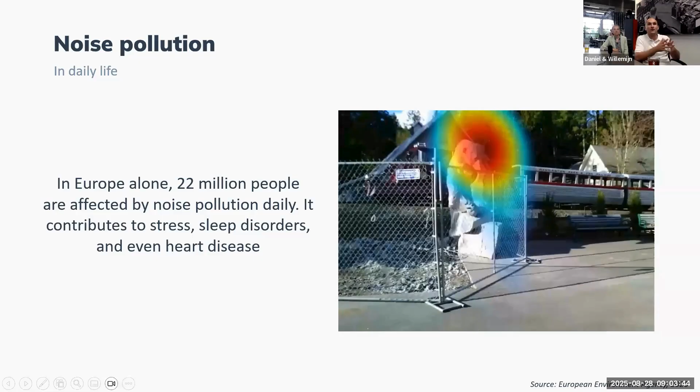Here's a video I took of a train while visiting the zoo, where I noticed how clearly the sound bounces off the concrete floor. And it made me think, in a city environment full of concrete buildings and floors, the sounds of cars, sirens, and jackhammers bounce back and forth. This constant reflection creates a soundscape where noise doesn't fade. This chronic exposure to noise, as already mentioned, impacts our health in many ways.

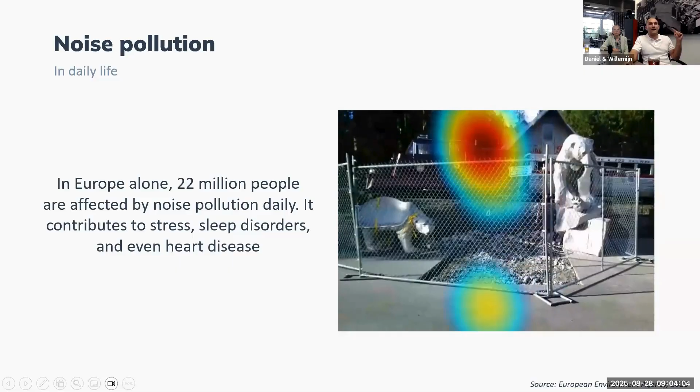And with all that in mind, you might be wondering, how loud is too loud? According to the World Health Organization, the threshold is about 70 decibels. As a reference, inside an airplane is about 80 decibels, which is already harmful for you if you're exposed to this level for a long period of time. It's also safe to say that sounds above 120 decibels close to your ears will cause permanent hearing damage.

We often mention noise, and I just want to take a moment to explain what separates any sound from noise. We define noise as sounds out of place, an unwanted sound. Many of us assume noise is just any loud sound, but that's not always true. A waterfall, for example, can be very loud, yet it's not considered noise because it belongs in its environment.

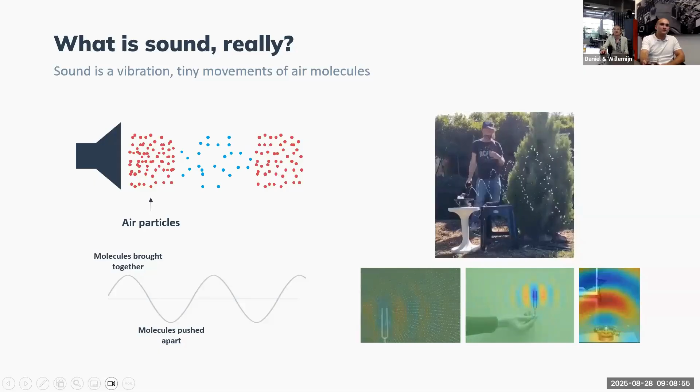Anyhow, jokes aside, sound works when a vibrating object creates waves in a surrounding medium, such as air or water. These waves consist of compressions, where particles are close together, and rarefactions, where they spread out. They travel outwards from the source, and when they reach your ear, they cause your eardrum to vibrate. And this is actually what your brain interprets as sound.

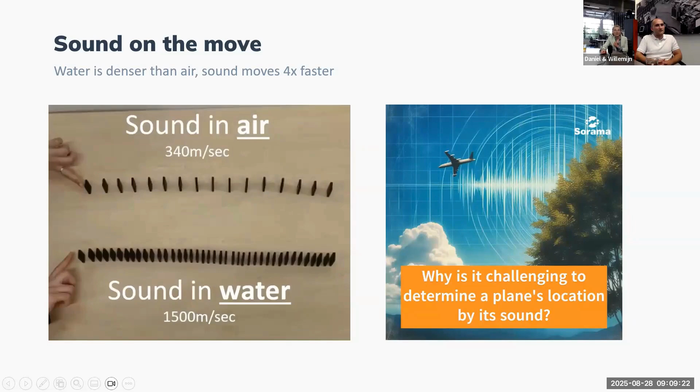A question to think about while looking at this video: why do you think it's hard to localize an airplane based on its sound? It's actually because of the travel time of sound. By the time the waves reach your ears, the plane has actually already moved on.

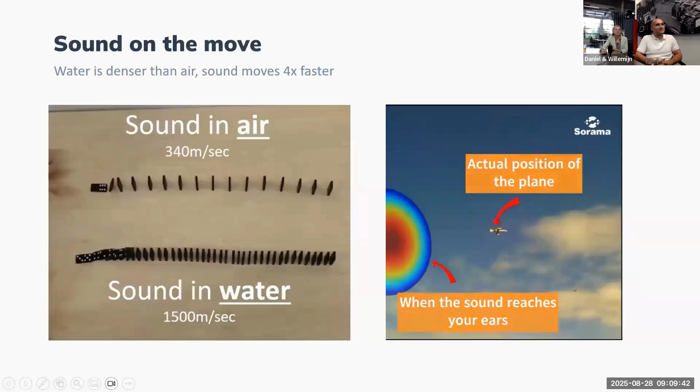So we don't just hear one sound wave, but we hear many of them at the same time. Different vibrations have different wavelengths, and these wavelengths determine the tone of the sound. High-pitched notes have shorter wavelengths, and lower notes, such as humming, have longer wavelengths. And these also tend to travel further.

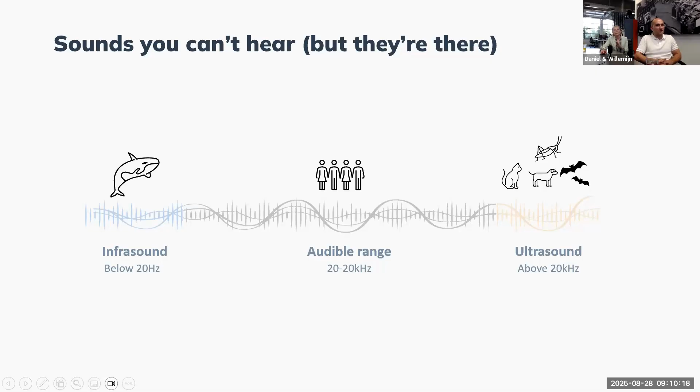On top of that, we also don't hear all of the sound waves around us, as humans have an average hearing range of 20 to 20,000 hertz. Below that range is what we call infrasound, and above that is what we call ultrasound. We can't hear it, but there's actually quite a lot of communication going on from animals in those frequencies.

An acoustic camera is used to locate and characterize sound sources. It works by using beamforming to process signals from multiple microphones and determine the location and direction of a sound source. By doing so, you can see where the noise is coming from, and this is actually quite similar to how our own ears localize sound.

Sound travels via sound waves to your ears, and when it first arrives at your right ear and later at your left ear, you can localize where the sound is coming from. In our case, we need at least 2 ears to localize sound.

An acoustic camera is even more precise because it has 64 and sometimes even up to 1,024 microphones. One microphone picks up the sound wave earlier than the others, and with a technique called beamforming, the location of the source is triangulated. The device then creates a colorful acoustic image over a camera stream as a visual aid, similar to how thermal cameras visualize heat. An acoustic camera literally lets you see sound.

Yes, thank you, Willemijn. To add to what you just said, I think the challenge with sound is that we hear it, but we don't always know where it's coming from. For example, recently I was walking in the forest and I heard a bird sing, but when I started looking for it, it was actually quite difficult to spot where the bird exactly was based on its sound.

When we visualize it, on one hand, we add another sense to the mix because now you can see it, and we can also learn how it interacts with the space around us. By visualizing where reflections are and how intense they are, it turns sound into something we can understand and act on, especially in complex environments.

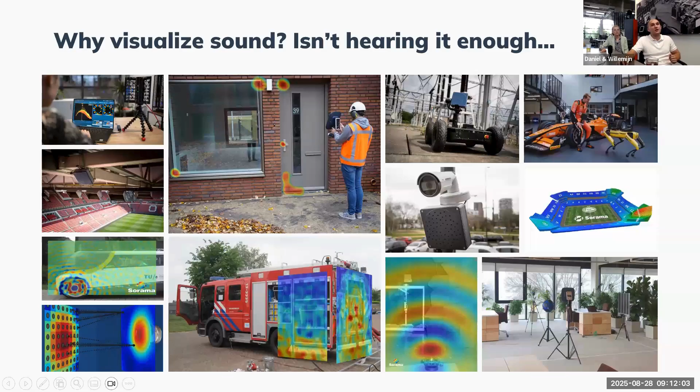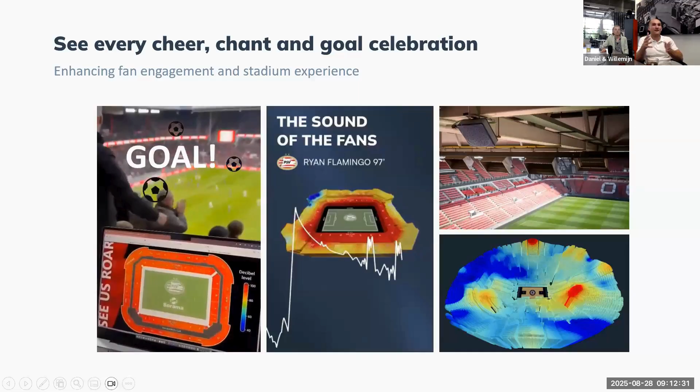Talking about visualizing sound, now imagine a stadium full of fans. Visualizing the sound during a game is used to engage fans by showing which sections are the loudest. It can be used for games like section battles or identifying the loudest fan. In fact, one of our US partners is already doing this. They track fan noise and link it to an app where fans can earn points that can be exchanged for tickets, drinks, or even free cheeseburgers. It turns fan sound into a reward system.

Moving from stadiums to city streets, these technologies can be used to detect loud vehicles like motorcycles or cars with modified exhausts to enforce noise regulations.

Visualizing sound is also changing how we study nature. Many animals use sounds we cannot hear to communicate, like bats using echolocation to navigate, or mice using ultrasound to communicate. We've worked on bioacoustics projects with mice, pigs, birds, bats, bees, crickets, each with their own unique sounds.

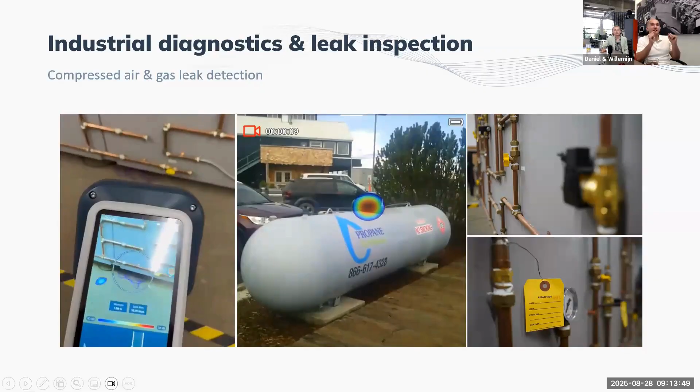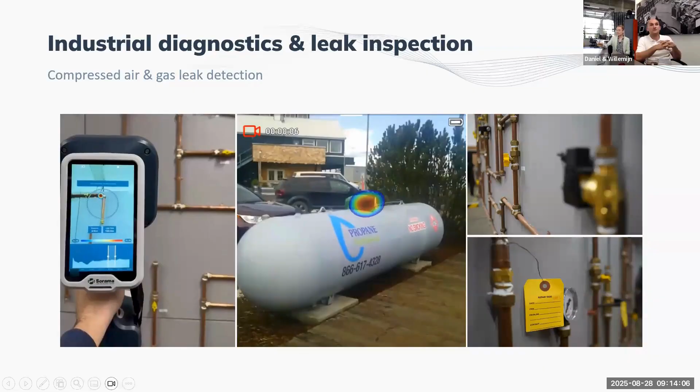We just saw a few creative applications of sound visualization, but its most widespread application is leak detection. In industry, acoustic cameras are widely used to find compressed air and gas leaks. How it works: imagine a tiny crack in a pressurized pipe that creates high-frequency sounds we can't hear, but acoustic cameras can pick up. This isn't only useful, it's essential, because up to 1/3 of compressed air in factories can be lost through leaks, costing tens or even hundreds of thousands in wasted energy.

Another key application is detecting partial discharge in electrical systems. These discharges produce unique acoustic signatures that show insulation issues in high voltage equipment. Visualizing these sounds helps to prevent equipment failure and improves safety.

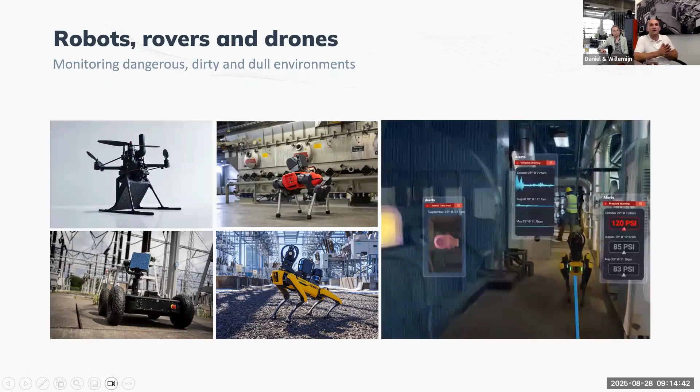Talking about safety, in environments that are dangerous for people, acoustic sensors can be mounted on robotic dogs, rovers, and drones. They can autonomously navigate industrial sites, tunnels, or remote areas to detect issues without putting humans at risk.

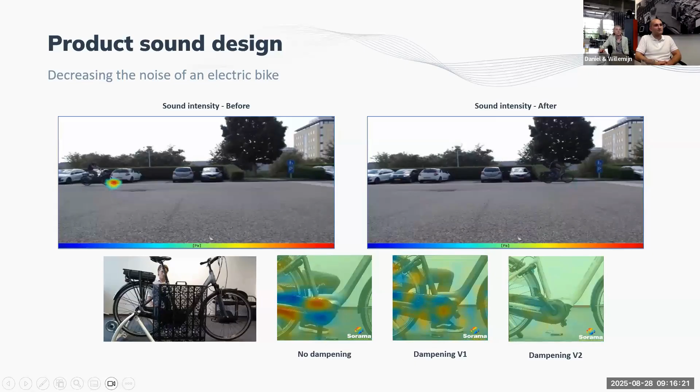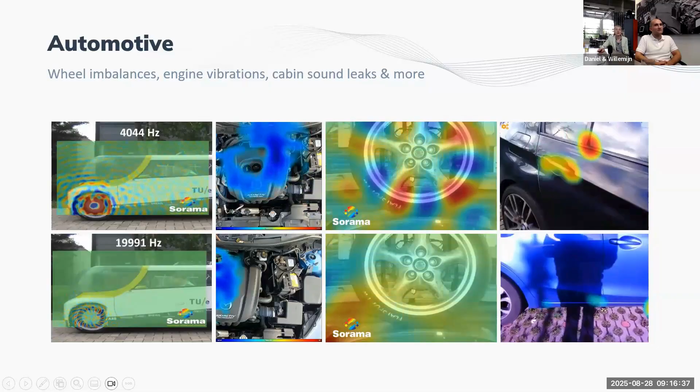Luckily, sometimes we also get to have a bit of fun with our technology. For example, during the Glow Festival here in Eindhoven, where every year designers and engineers create interactive light art installations, a couple of years ago we participated by creating an experience that would create visuals underneath you when you make noise. And that is definitely something that you don't have to tell kids twice—we've experienced that firsthand.

Lastly, there's also citizen science projects that allow us to gain insight into the soundscape of a bigger region. Each year we organize the Noise Awareness Day, where we ask the public to make sound measurements with their phone in order to create awareness on noise pollution.

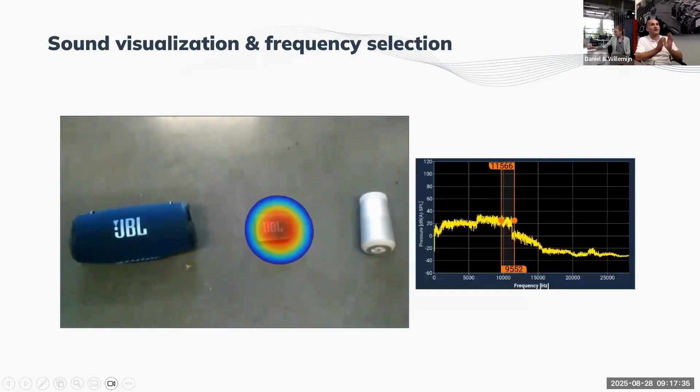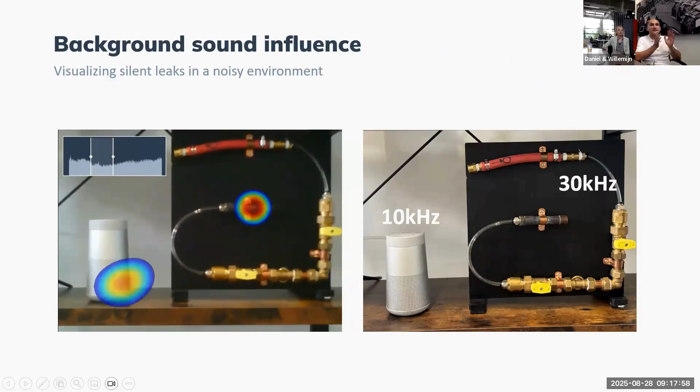People often ask us if acoustic cameras can focus on certain sounds and ignore background noise. Actually, that's one of the key things they're designed to do. The three speakers you see in the video play at the same time at a different frequency, but we can choose which one to see. That's because the camera doesn't show all the noise around you—it shows the frequencies you choose as a user. That makes it possible to spot a quiet leak next to a loud machine. It can see the leak's frequency and ignore everything else.

Okay, now let's take a short breather and summarize what we covered so far. We explored how sound visualization can be useful in nature, cities, stadiums, industry, and for inspections through robotic platforms, as well as product development. Now let's look at how this technology applies to the built environment.

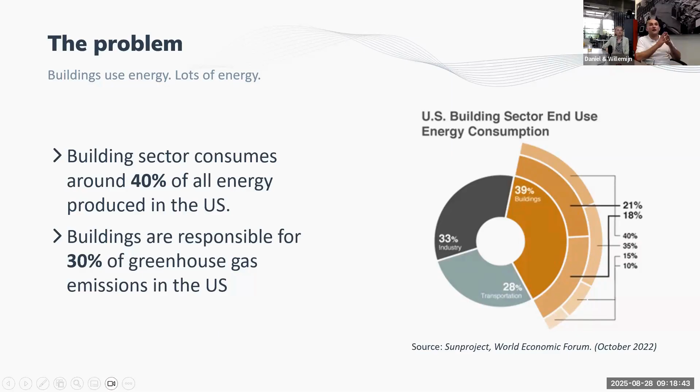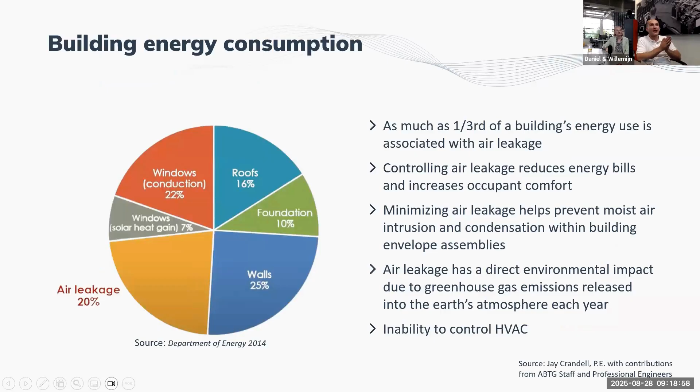Buildings play a huge role in energy use and emissions. As you know, in the US, the building sector consumes nearly 40% of all energy produced and contributes 30% of greenhouse gas emissions—that's more than any other sector. A major step toward reducing environmental impact is improving how buildings are built and maintained. Improving the performance of a building starts with controlling air leakage. When it's not managed properly, it affects everything from comfort and moisture control to HVAC efficiency and emissions.

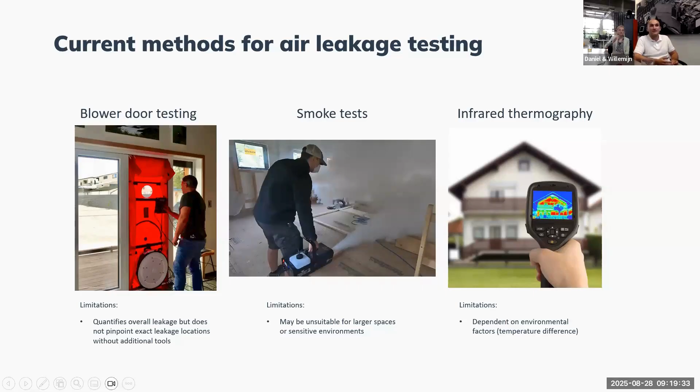As many of you know, the blower door test is currently the go-to method of testing how airtight a building is. It's great for meeting energy standards, comparing buildings, or seeing if renovations made a difference. But the catch is it only gives a general idea of how much air is leaking, not where the leaks are. Finding specific leaks can be slow and tricky. There are tools like smoke sticks, infrared cameras, and tracer gases that can help, but they all have limits, like needing certain temperature or pressure conditions to work well.

Today, we'd like to show you how sound visualization can be a useful method. We use it to spot leaks and gaps in buildings quickly and clearly.

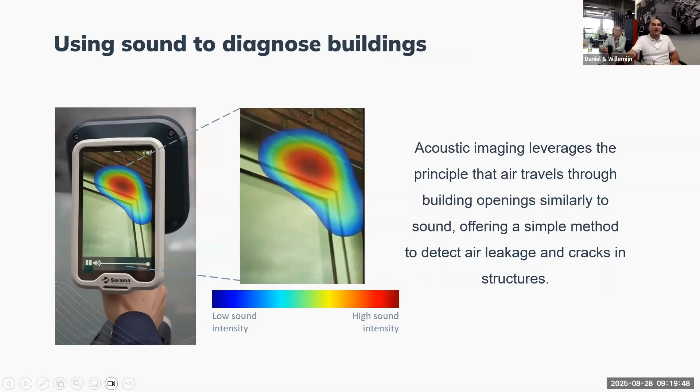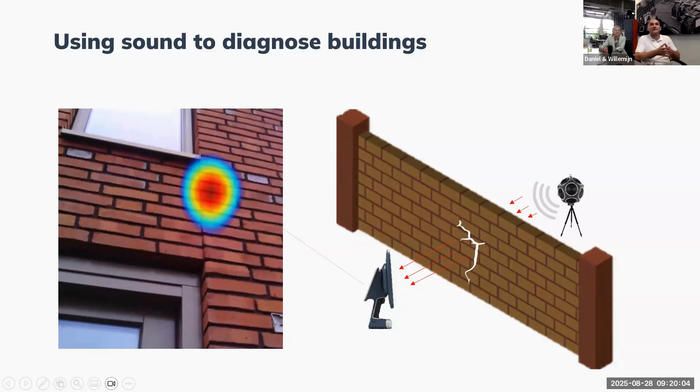The idea is simple: to find leaks, we need to make noise on purpose. We play speakers to generate sound, which finds its way out through any fractures and cracks, same as how the air would escape. Then the acoustic camera registers these leakages and pinpoints the location.

Here I have a short video to give you an impression of how a practical test looks like. On the opposite side of the door, we have the speaker generating sound. The sound waves penetrate through any openings, and we are able to visualize it with an acoustic camera.

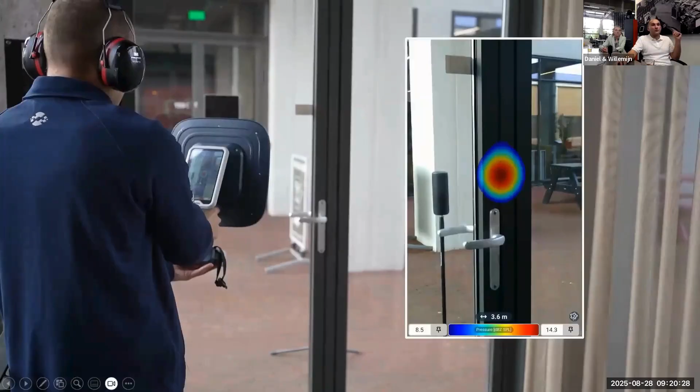Probably you're wondering, how does acoustic imaging compare to thermal imaging? Here I have a side-by-side comparison. This is a newly built passive house undergoing the blower door test. On the left side, you can see how a thermal camera registers the air leak, and on the right side, how an acoustic camera registers the air leak.

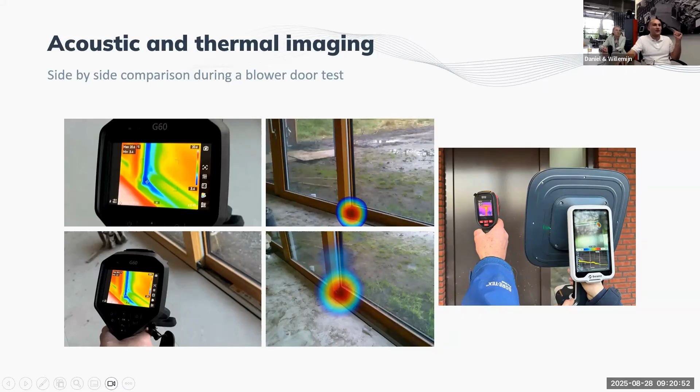In some situations, acoustic imaging can be a bit more sensitive. For example, here the thermal camera registers the leak mainly on the bottom right corner of the window frame, whereas the acoustic imaging reveals the whole bottom slit leaking. So a combination of both tools will give you the best results.

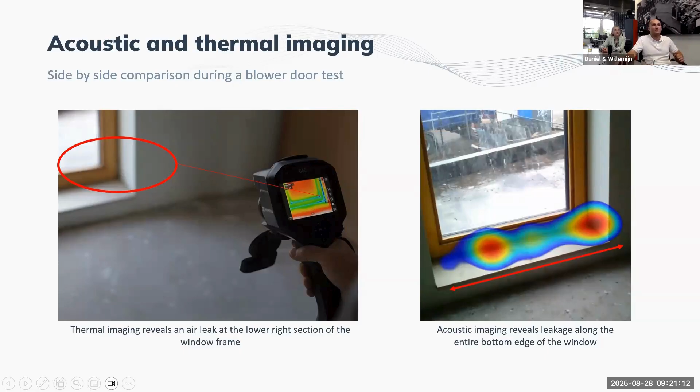To summarize how acoustic imaging compares to thermal imaging: on one hand, you are not dependent on going through the hassle of installing blower door equipment. The buildings can be tested throughout the whole construction process because you're not working with closed volumes.

Right now, it's quite warm in the Netherlands, so a thermal camera will not work effectively, and acoustic imaging can be an option. You can verify acoustically whether the thermal camera leaks you're registering are not reflections, thermal bridges, or false positives, and you don't need advanced training to use this technology.

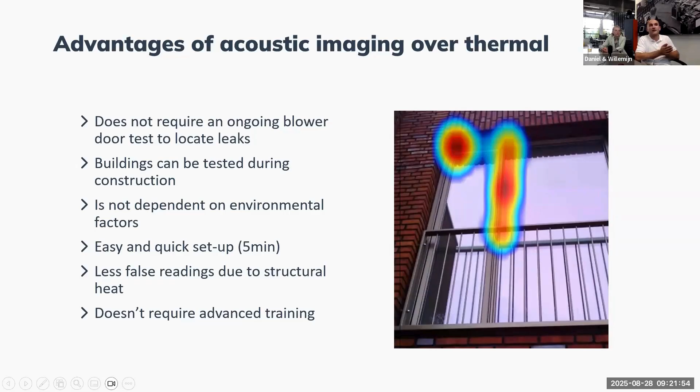To test buildings with sound, you can use anything from a simple handheld Bluetooth speaker to a professional omnidirectional one. The goal is to make sure sound reaches all parts of the area you're testing. If you're using a less powerful speaker, it's important to move it around the frame to ensure full coverage.

It's usually best to place the speaker inside the building because hard surfaces help reflect the sound outwards, which makes the test more effective. Depending on the situation, you can use sounds that people can or cannot hear, especially useful when testing in occupied buildings.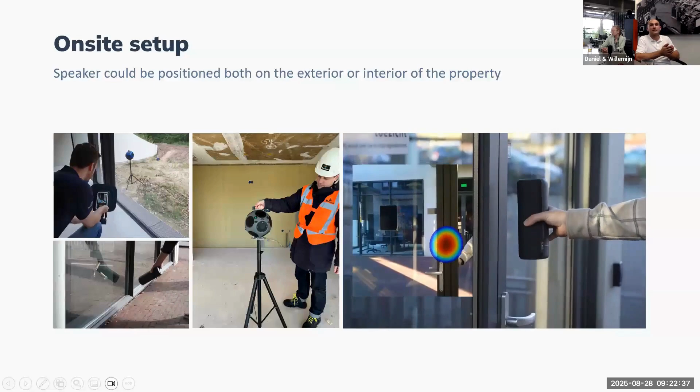Now let's explore some of the practical applications of this technology. In the next few slides, I will show you many different use cases on different types of buildings that I have personally measured. Let's start with the first one.

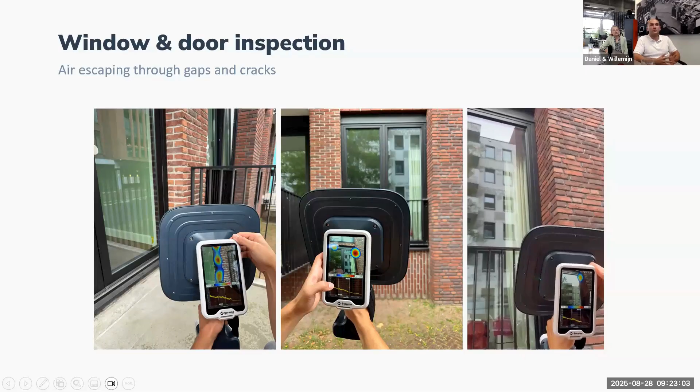As you know, windows and doors are usually the weakest points in the building envelope and contribute most to air leaks. Proper installation and quality control is crucial because even the most energy efficient windows won't perform if installed poorly. It defeats the whole purpose of investing in high performance windows. Without proper sealing around the frame, for example, air and moisture can easily sneak in and reduce the lifespan of your products.

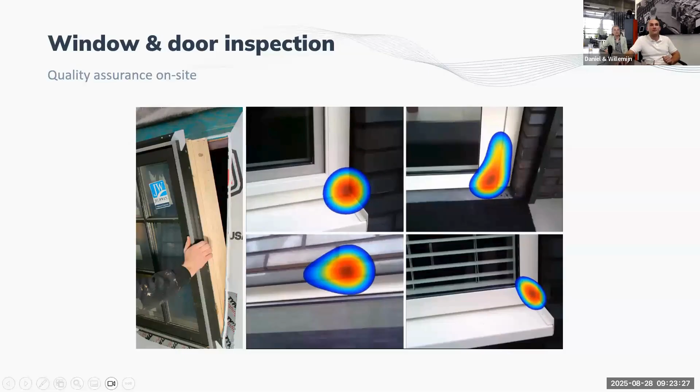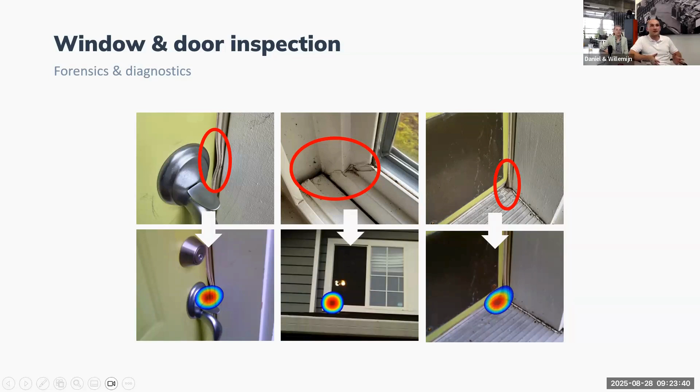In addition to testing the installation on site, window and door manufacturers can benefit from the technology to make their products better. It can be used to test different sealants, insulation materials, glass thickness, and make very quick product iterations.

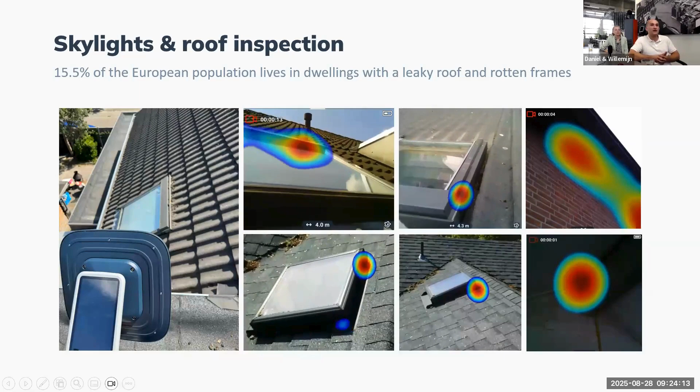Leaky skylights and roofs are a growing issue across Europe, affecting over 15% of the population. And when it comes to leaks, time matters. If ignored, even small air and water leaks can lead to serious damage. Older skylights often leak because of damaged seals. It's a useful application not just for installing new skylights correctly, but also for quickly diagnosing problems in existing ones before they get worse.

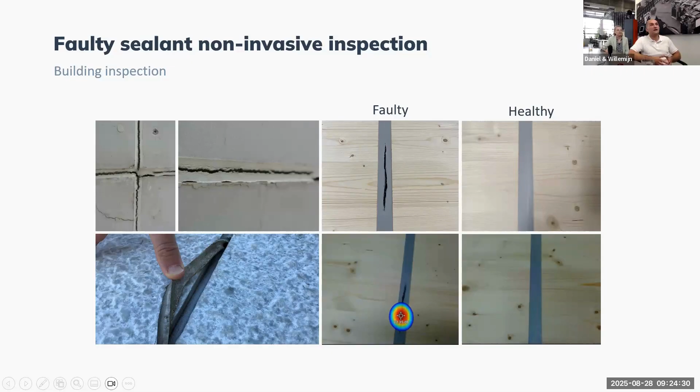Sound visualization can be a surprisingly powerful method for inspecting worn-out sealants, as there are currently no non-invasive methods available for testing sealants apart from a visual check, which is very subjective. This method is more factual and objective.

Leaks in facade joints and corners are common issues in buildings, often stemming from material deterioration, improper installation, or design flaws. The first step of addressing the problem is identifying it. This is where technology can be useful. If a facade is not leak-free, apart from the energy efficiency losses, it might result in moisture issues, which is very expensive to fix down the line.

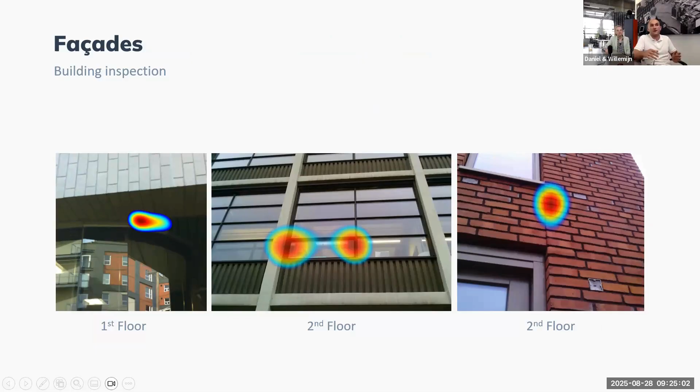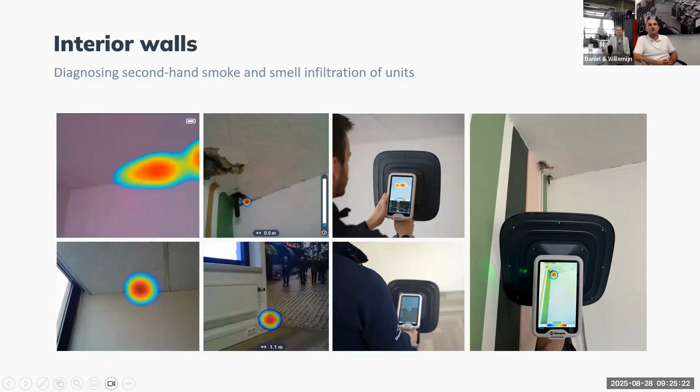In multi-unit buildings, smoke or cooking smells from one apartment can transfer into another through shared walls or ceilings, especially due to poor connections between the ceiling and the interior walls. If you're trying to diagnose the root cause of mystery smells in your buildings, acoustic camera technology might come in handy.

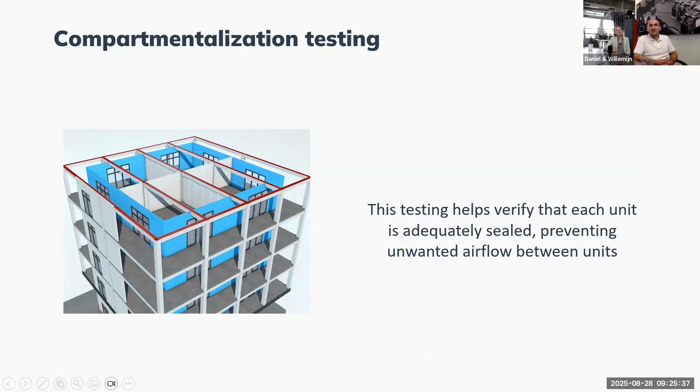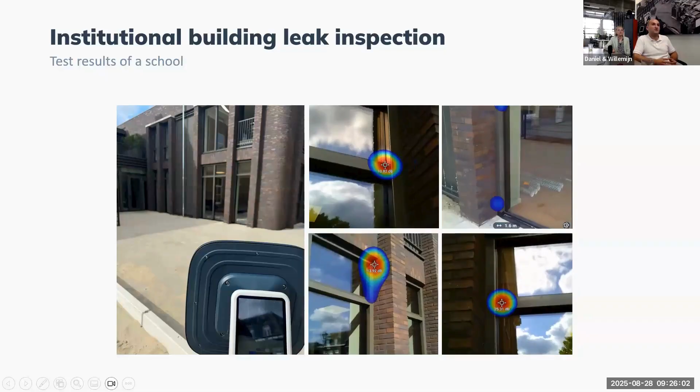Institutional buildings like healthcare facilities, educational institutions, or libraries and museums in Europe often face stricter air tightness requirements, especially when they are part of energy performance regulations or high-performance building programs. On this slide, you can see the results of a school building test in the Netherlands and the leakages we were able to find. In historic buildings, especially protected ones, traditional air leakage testing can be risky.

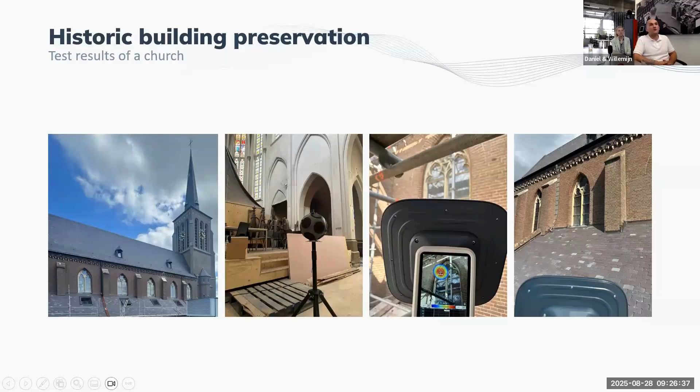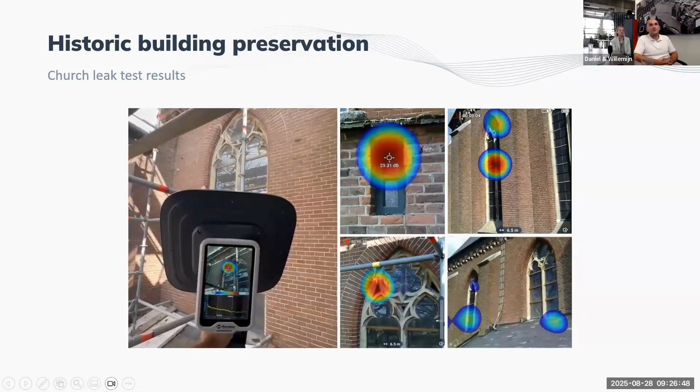Pressurizing the building with a blower door may disturb fragile materials, release dust from within the structure, or damage valuable furnishings. That's why acoustic testing can be a valuable alternative. It's completely non-invasive and works under natural, low or no flow conditions without needing to force air through the building envelope. This slide shows a test we conducted in a church where we were able to identify leakage paths without disturbing the structure or its contents.

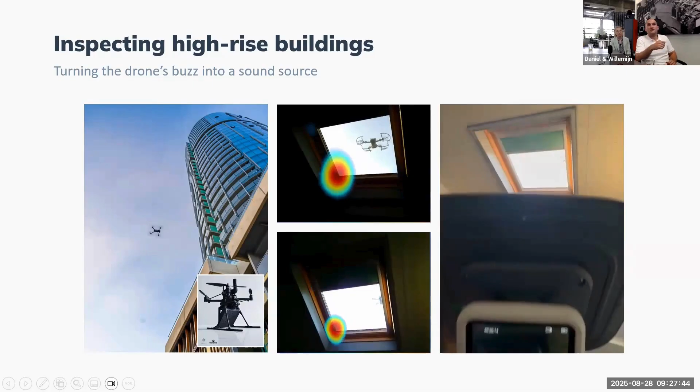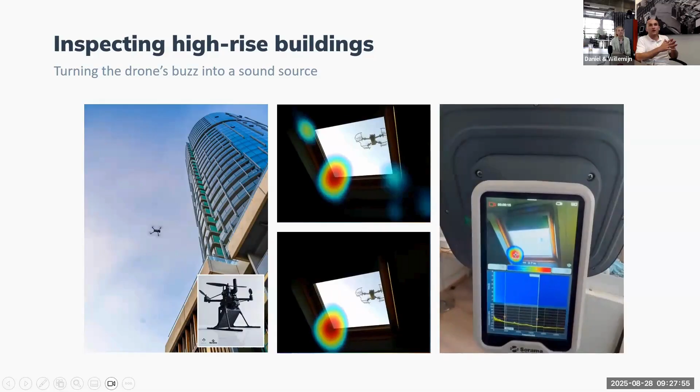So how can you inspect high-rise buildings? It's a question we often hear. A creative and practical solution is to use a drone. We can use its buzzing sound as a sound source. The drone's propellers naturally generate high-frequency noise, which acoustic cameras can pick up and visualize. This allows us to detect leaks around windows, facades, and joints in high-rise buildings.

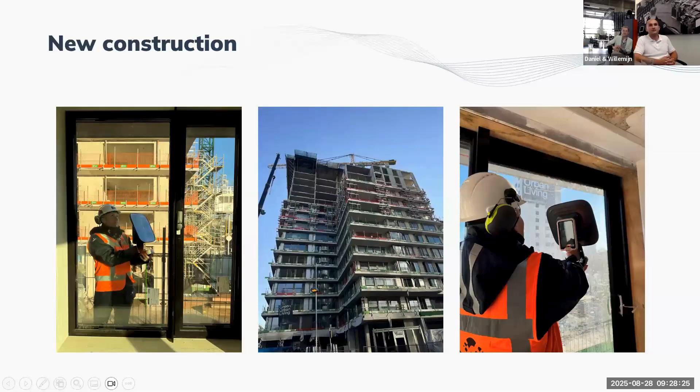Unlike traditional methods that need sealed rooms and finished spaces, with acoustic camera technology, you don't have to wait for the paint to dry, so to say. It can be used throughout the entire building process, from early construction to final renovations, since they don't rely on closed volumes. They're perfect for spotting leaks and flaws before walls are sealed or systems are locked in. The technology can help detect leaks very early during the manufacturing of prefab facade systems, wall panels, and modular units to make sure everything is sealed properly from the beginning.

However, they're usually tested when everything is clean, controlled, and precise. That's when airtightness looks great. But once these systems are installed on site, things change. Assembly in the field almost always leads to more air leakage. Sound can be useful during production to catch issues early, and later during installation to make sure quality holds up in the real world.

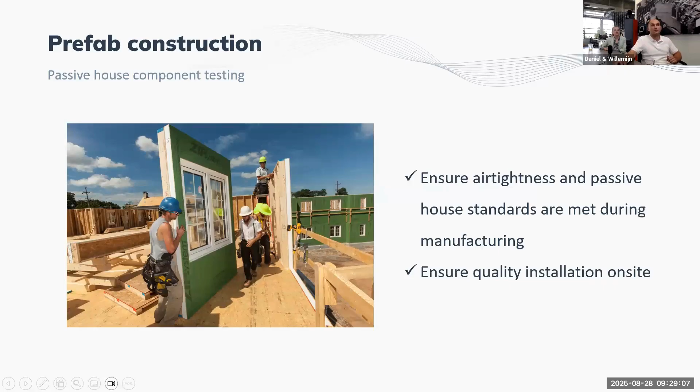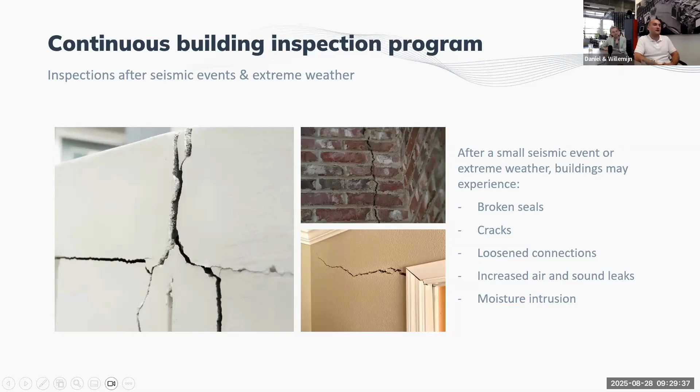Making high-performance building is just the beginning. Airtight buildings don't just stay airtight on their own. Over time, things like extreme weather or small seismic events can affect how well a building performs. With this technology, inspections can be done quickly and easily after such events. Regular checks help building owners, consultants, facility managers catch issues early and keep energy efficiency and comfort on track. And with this, I'm going to hand it over to Willemijn.

Yes, thank you. So sometimes it's not about reducing energy loss of the building itself, but about improving the well-being of the people that are on the inside. So occupational hygienists, for example, they are known to use this technology to get a grip on the noise on the work floor.

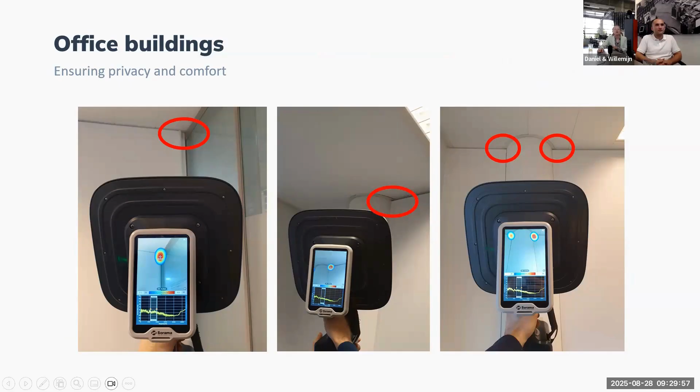This is actually an example from the Dutch Office of Unemployment. Inside of these rooms, very private discussions are being held with vulnerable people. So it's very important that whatever is said in there stays in there and not literally leak outside for everyone to hear. Being able to quickly improve the soundproofing of these rooms significantly impacts the comfort and trust of the visitors. Obviously, the technology can also be used to strategically place dampening materials on reflection hotspots, making sure that the room itself is pleasant to be in as well.

It can also be about preventing unwanted particles, such as dust, from coming in, making sure that the inside stays as sterile as possible for sensitive equipment, such as in these type of clean rooms.

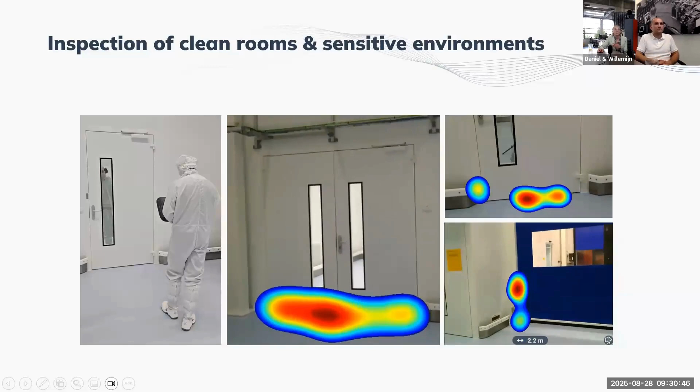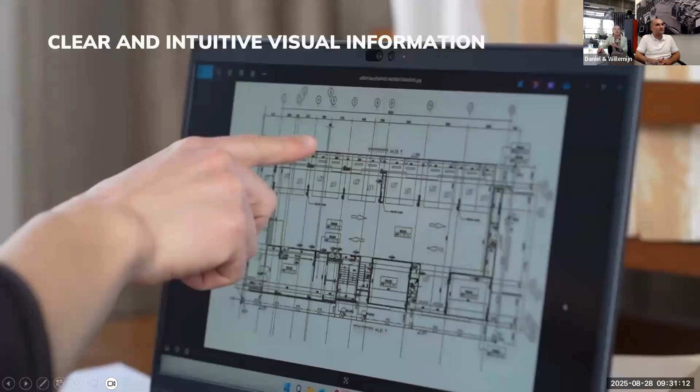Thank you, Willemijn. To summarize, I think we've covered a lot today, from what sound really is to how visualizing it helps us understand nature, catch noisy vehicles, engage fans, improve products, and even make buildings perform better. I really hope you learned something new today.